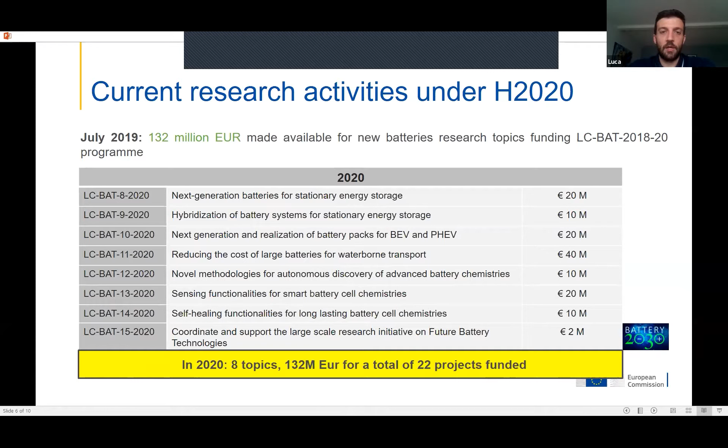The key takeaway of the last three slides is that since this started in 2018, there has been an increased number of topics available throughout the years, an increased number of projects funded, and an increased available budget. This represents the fact that these research activities have become more important. Specific topics have been allocated, new activities to research and agree on these topics, such as the battery partnership, have been set up. I think these activities are here to stay, and we will see more in the future after 2022.

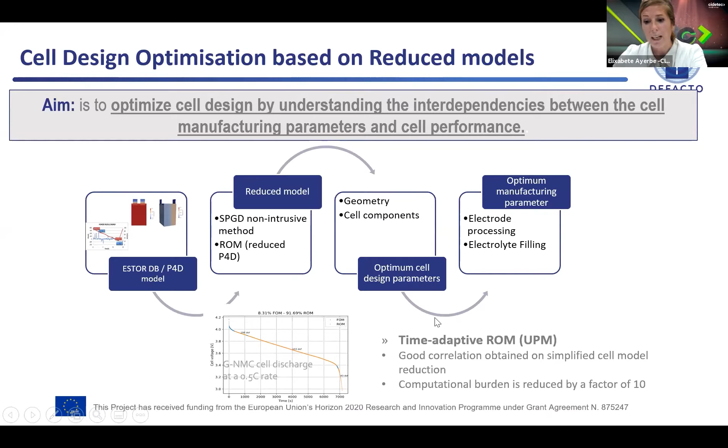So when we do these optimizations, we need to rely on experimental data, and this data will be obtained within the whole domain, starting from materials, coming to the electrodes, and then going to the cells. Basically, the aim is also to track the uncharacterized intermediate products along the manufacturing process.

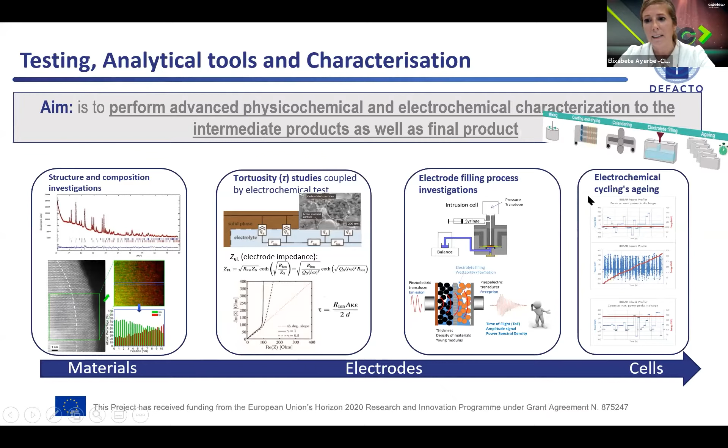So electrochemical and aging tests will be done on pouch cells, and there will be two kinds of pouch cells. One is coming from the prototype pilot lines, what we call prototype scale cells, and the other will be manufactured by an industrial partner, a commercial cell, graphite NMC 622.

So we will be having a comparison between the two scales, and we are also currently inserting and implementing sensors throughout the production line in order to get data monitoring of the manufacturing process.

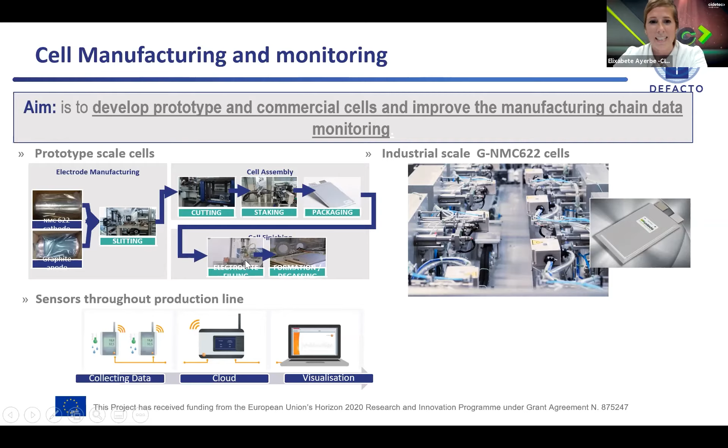So with this, I would like to thank the whole consortium. We are 13 partners around different EU countries, and I'm at your disposal if you want to ask any question. Otherwise, you can reach me at this email account.

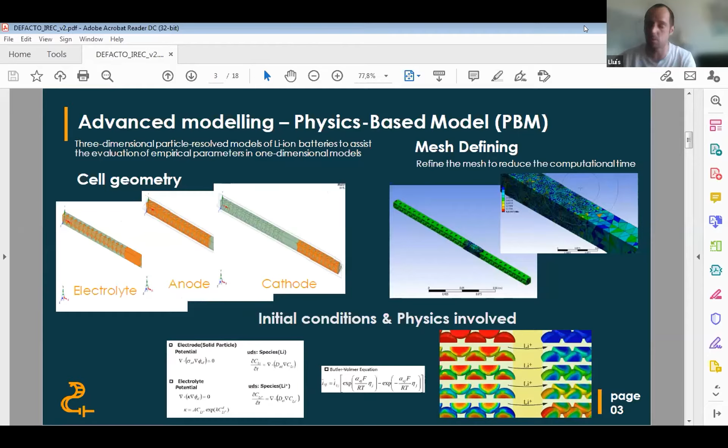In the physics-based model, the full order model, what we do is define the geometry for the components - the cathode, anode, electrolyte, and so on - then define a meshing, and then we have to put in all the conditions and physics involved for this exchange of ions. There are applications like analyzing the aging process, or even reducing the effort in aging tests, optimizing cooling systems, or analyzing these complex phenomena that happen inside the cell.

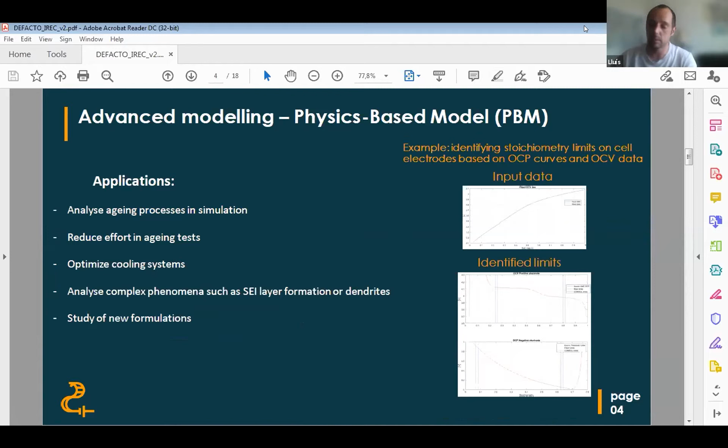But since what we want is to run this kind of model in some embedded system, what we have to do is aim for this reduced order model, where we have to reduce the complexity of the model but still capture some of these key phenomena.

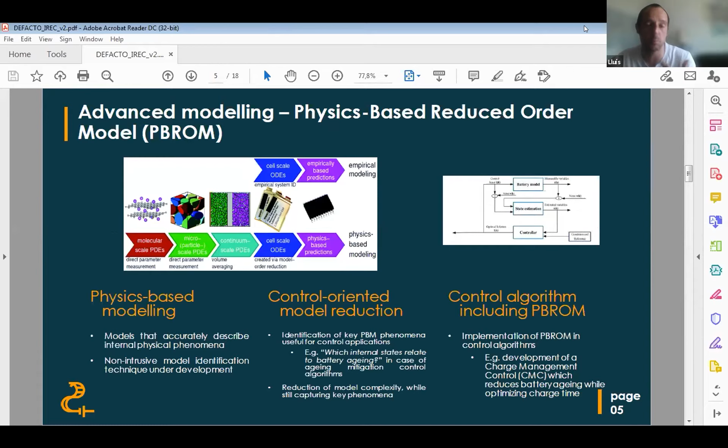And then we can use it online, this kind of algorithm, for instance, for charge management control. During the charging of the battery, what we can do is optimize it by reducing the impact of the degradation of the battery. Then on the other side, we have a novel amount of sensors proposed for batteries.

Of course, we have the standards - voltage, temperature, and current - but there are many others, like the strain gauge or the EIS, the electrochemical impedance spectroscopy, pressure, gas detection, humidity, and others. There are many. They can also be placed on the cell or sometimes inside the cell. There are these two options.

Here in the COBRA project, what we are trying to do is improve what we call the smart cell functionalities, like providing some sort of small brain to the cell just to let it handle itself and provide useful information for the BMS. So just some examples, for instance, the EIS sensor.

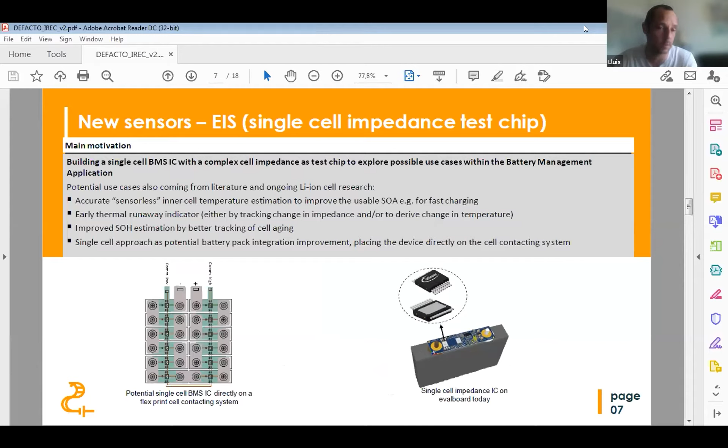It can be used to gather information and estimate the core temperature of the cell. This is very important, for instance, for fast charging strategies. Also, it can detect thermal runaway, so early detection of failures, very important from the safety point of view, but it can also provide information about the state of health.

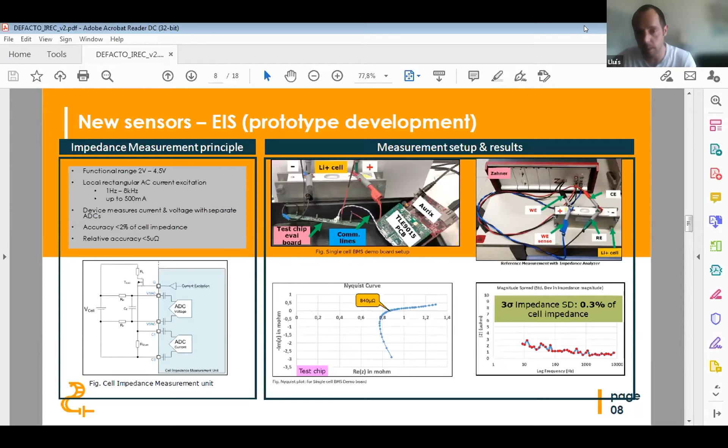Here you can see some of the main features of the prototype that's under development, some pictures here and some preliminary results. And we also have the strain gauge.

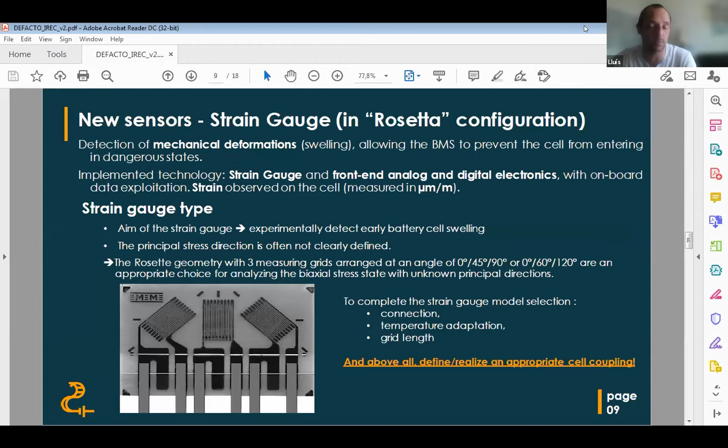Here, what we are measuring is the mechanical deformation, because the cells have this swelling, changing of volume, when they are at different states of charge, for instance. So we can provide some inputs to the model just to identify correctly what the state of charge is, but it can also prevent excessive swelling, for instance, if it can indicate that there's a danger behind it.

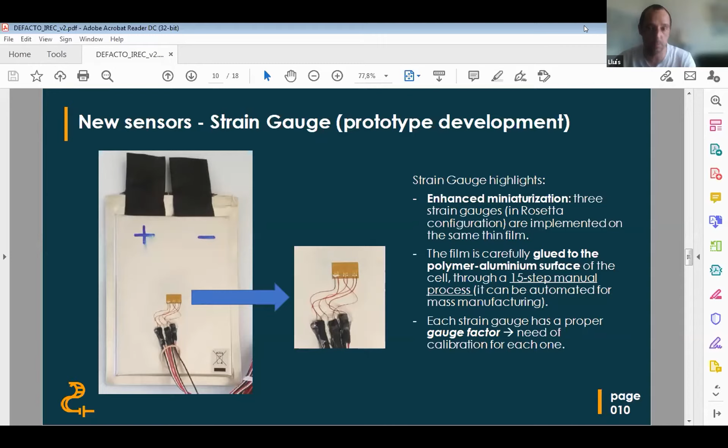Here you can see some images of the prototypes and the development. And here, for instance, one of the challenges is attaching the sensor to the cell, which currently is a 15-step process, but it can be automated, and we are working towards that.

We also have a multi-gas sensor based on laser technology. Depending on the wavelength, it can detect different types of gases. This is important from a safety point of view, because there can be problems inside the battery if some type of gas is detected.

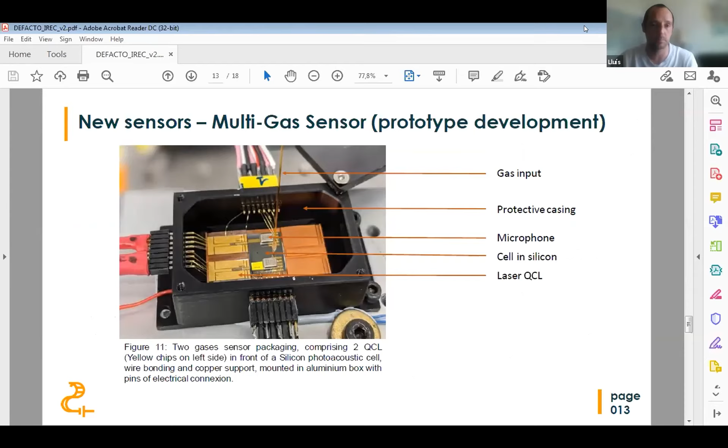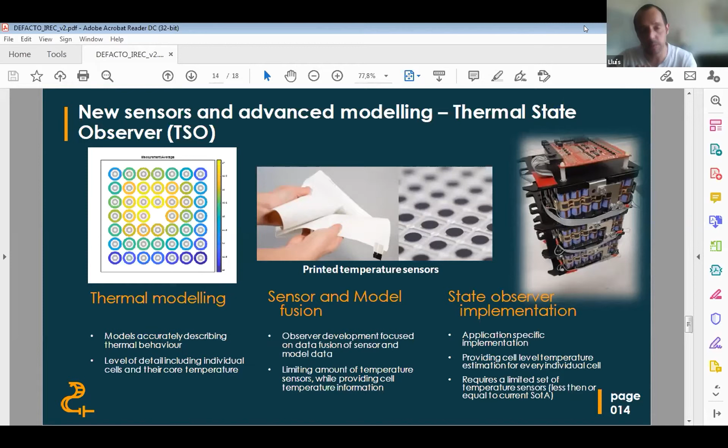Here's also a picture of the prototype and its development, with the main components depicted. And we have here an example of this twofold approach, because we are developing a thermal model of the battery, but also placing temperature sensors at the cell level, and then we can mix this information. In this way, we can have something very accurate, providing information about the temperatures inside the cell and throughout the battery pack.

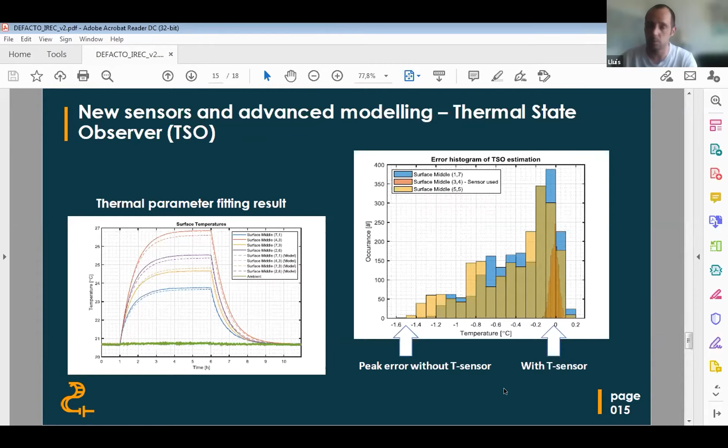Here are some examples of the application. You can see how the error, when you are only using your algorithm and model, is approximately 1.5 degrees peak error. But when we mix the information from the model and the sensor, the error is 10 times less, nearly zero. So that's the kind of application, and just a summary of this twofold approach.

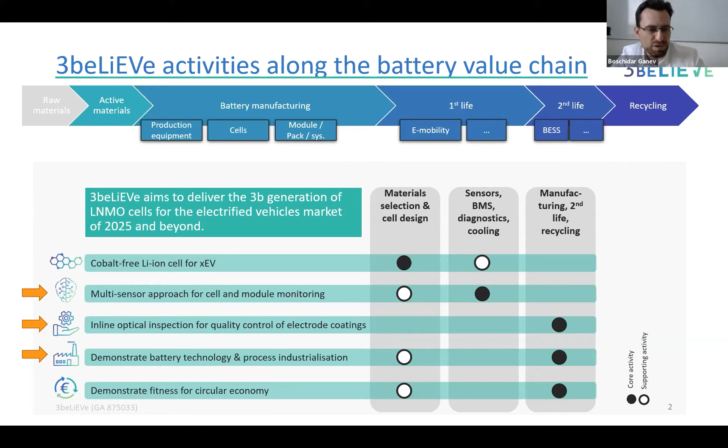While digitalization is not the core topic of the project, it is actually a cross-cutting aspect across almost all of these topics, and I just want to touch briefly on three of them. So the first is on the battery manufacturing level.

As we know, in the electrode coating process, when it comes to deposition of the slurry, sometimes there can be an inhomogeneous deposition, which can lead to coating defects. That means there can be too little coating in some parts of the electrode or too much material in other parts, and this can manifest as scratches, pinholes, cracks, or agglomerations.

The challenge is that both electrodes, the cathode and the anode, are quite dark materials, so visual inspection is quite difficult and would be very time consuming by eye.

So we can employ an optical image acquisition process, and the data acquired from this can then be used with machine learning to detect the defects and classify them by defect type. So what can a system for this look like?

In terms of the system, it's a camera with a set of 4 lights that sits as part of the electrode coating steps.

After the slurry deposition and the drying process, a camera inspects the coated foil using 4 lights and acquires images, computing surface normals and the depth map of the surface, and then, as shown in the previous slide, detects the various defects.

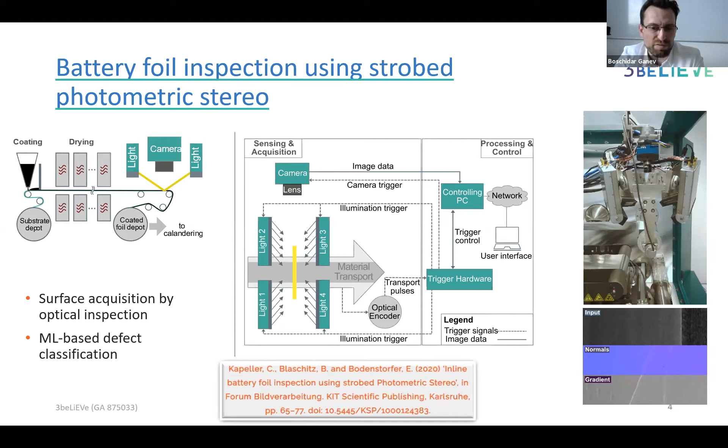Coming to the multi-sensor approach: like in Cobra, we also employ multiple sensors that, beyond voltage, current, and temperature, also do EIS measurements, strain or deformation measurements, and can do gas detection.

The first order of business here was to establish a common communication architecture so that signals acquired from these sensors can all be relayed via a common data bus to the battery management system. The other aspect is that the open source based foxBMS system had to be updated in order to recognize and process these signals.

The second aspect of digitalization is that if we think about the measurements coming from all these sensors, tracking all the different data points over weeks, months, or even years of battery lifetime, a lot of data would accumulate. At the same time, usually on BMS there's only very limited data storage capacity, typically reserved for safety and performance metrics, so there's very little space for large volumes of cell cycling operational data.

But this cell cycling history can be very valuable. Two examples of what can be useful: on one hand, after the end of first life, a potential second life operator would be quite interested to know how the cell aged. Apart from its state of health, which might be relatively easy to determine, it makes a difference under what conditions it reached this state of health. Having access to such data could help better estimate what second life uses such a battery could be put to.

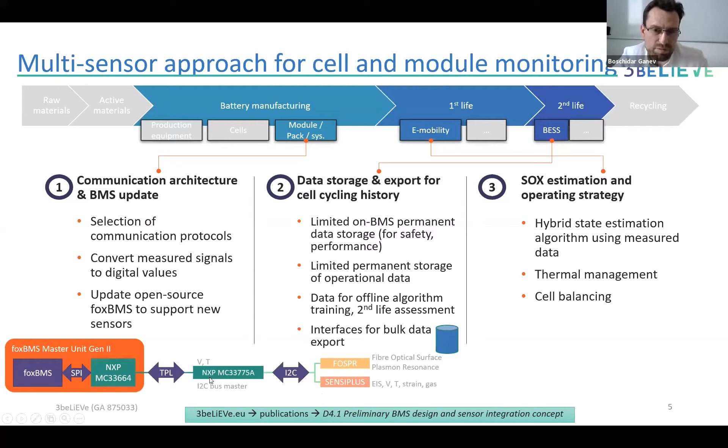Finally, when we've finished designs on cell, module, and pack level, we like to think about what production of this technology looks like on a gigawatt-hour scale. So we start to model the processes: what does the real-life process look like, what are the necessary parameters, and how can we model this. For this, it's necessary to model the attributes of machines and input parameters in appropriate simulation modeling software.

Here on the right you see just one example, a small subset of the processes: a 2D simulation of notching, lamination, and stacking—but there are many more processes that can be modeled.

The interesting takeaway is what questions can be answered with this model. I've put just a small subset here: what does the factory layout need to look like to produce a certain volume of cells, modules, or packs? What are the interactions between different process steps in the production line? How can material flow be improved? What is the energy use and corresponding greenhouse gas emissions resulting from production processes?

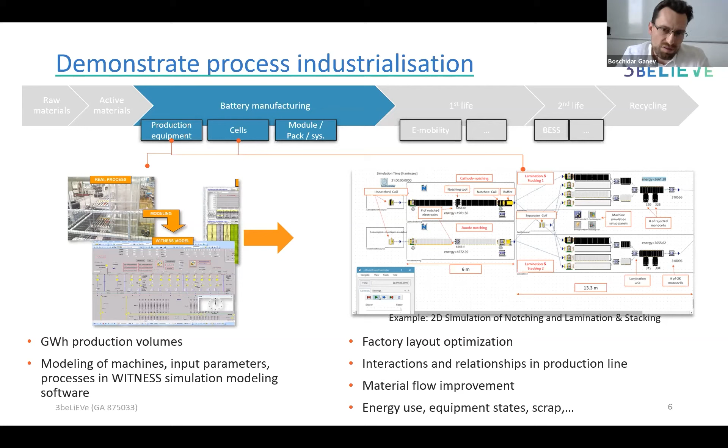As you can see, we have a large number of partners—21 partners from 10 different European countries. I'd like to extend my thanks for the very good collaboration so far. We are in month 18 of our project, with 42 months in total to go.

Many aspects I showed in the previous slides are still under development, but when the time comes, we will publish results. I should also mention that 3beLiEVe has opted into the open research data pilots, so we absolutely intend to make some testing data sets available to fellow researchers.

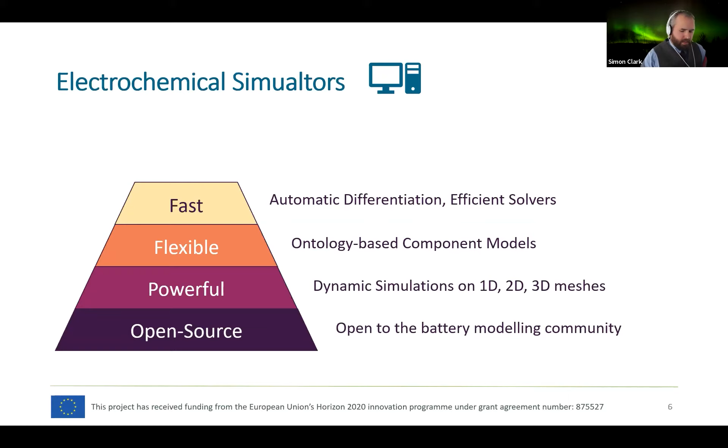In Hydra, we're bringing all of this together in an open source battery modeling platform that we call BattMo. So what is BATMO? BATMO is a finite volume continuum modeling framework for electrochemical devices. So for those of you with a background in the field, it's capable of solving P2D, P3D, P4D models.

It's electrochemistry neutral. So of course in Hydra, we're focused on the development of lithium-ion battery models for generation 3B materials and components, but we're not limited to just that. BATMO is flexible and can model post-lithium-ion systems as well as even hydrogen and electrolyzer systems.

BATMO is currently implemented with custom solvers in MATLAB to enable it to be very fast and efficient. And we plan to make it even faster by creating an implementation in the open source language Julia. So this is planned for release in summer 2021. When it's available, you can find out more about it at batterymodel.com.

So moving forward, I'd like to highlight the experimental database section, starting with a quote. "Data, data, data," he cried impatiently. "I can't make bricks without clay."

And who said this? It could be a frustrated PhD student. It could be the PI bursting into your lab. But this was Sherlock Holmes 130 years ago. How little the world has changed. And in Hydra, of course, and in battery digitalization generally, this is true.

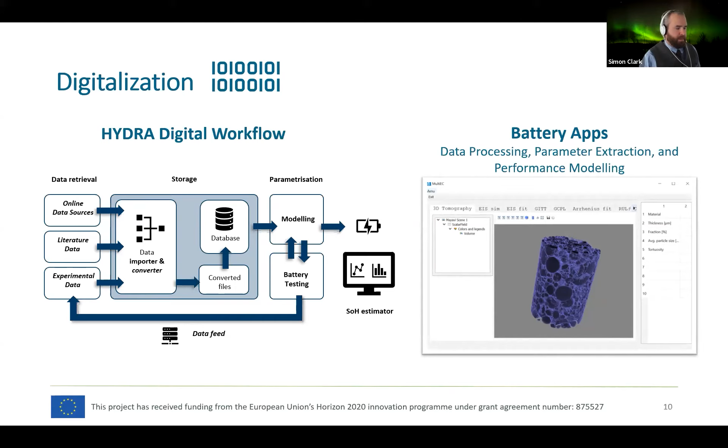So just to summarize, battery design requires knowledge, models, and experiments, and digitalization enables the efficient exchange of information in the design process. In our project, knowledge is formalized in an ontology. The modeling ontology is used as a foundation for a flexible, powerful modeling framework. And the characterization ontology is used to ensure the interoperability of experimental data.

Data exchange and operations are described in experimental workflows, and within Hydra, we're developing user-friendly battery apps to help make this as accessible and useful to the battery community as possible. If you're interested in learning more, you can visit these websites: bigmap.eu, h2020-hydra.eu, and batterymodel.com. So thank you for your time and attention.

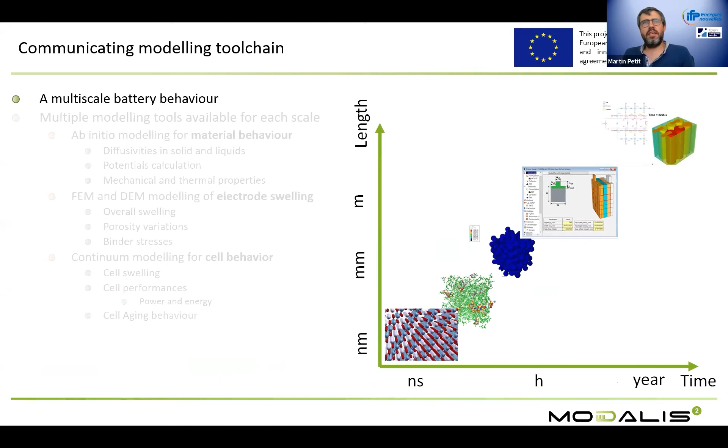One of the main issues that we have regarding modeling in batteries is that we are facing a multi-scale behavior, as you know, from the material scale to the global system scale, and multiple modeling tools are available for each scale. Ab initio modeling is used in order to get the behavior of the material, especially diffusivities, potentials, mechanical properties.

Specific mechanical modeling is also of use at the mesoscale or microstructure scale for the overall swelling of the electrodes, the porosity variations, some stresses on the binder. And one of the main...

...objectives is to get the complete cell behavior that we get at the continuum modeling scale. And we are aiming in MODALIS2 to get from this modeling scale the cell swelling, the cell performances in terms of power and energy, and cell aging behavior.

So the aim of MODALIS2 is to create ways of passing parameters between these scales and tools in order to be able, from a modification at the material level, to understand the global behavior of the cell at the system level, thanks to correlations, Arrhenius laws, and so on, but from the lower scale calculations.

In parallel, for all these dedicated modeling approaches, a dedicated experimental campaign is made thanks to devices and facilities that we have in the consortium, as we need dedicated experiments for model calibration and also model validation.

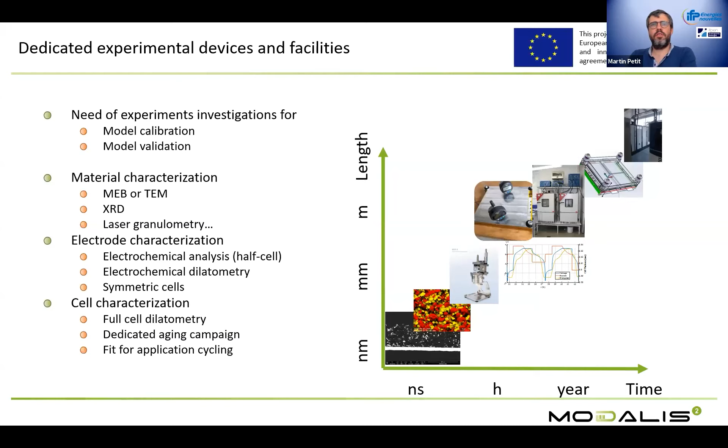With the full cell dilatometer, a dedicated aging campaign is used in order to analyze the aging of the cell. And in this aging campaign, we will have some dedicated tests fit for the final application, that is the automotive application.

So as I said earlier, this modeling toolchain is to be developed especially for new battery technologies. There are already a lot of modeling developments that have been done for classical Gen 3 batteries. But in this project, we want to focus on next generation batteries, especially high content of silicon for the anode in the Gen 3B cells. So as we know, in this case, we will have a higher specific energy, but also a higher mechanical degradation of this electrode due to the behavior of the silicon.

So in order to characterize and analyze this behavior, we will have some ab initio modeling of the material properties in order to get the thermodynamic properties of the silicon oxide of our material for the negative electrode, the thermal and mechanical properties of the silicon oxide, and the transfer properties in the liquid electrolyte, as well as the active material.

Then, thanks to this data, we'll be able to perform a mechanical modeling of the negative electrode, giving the swelling of the electrode as a function of state of charge, of C rate, and of the constraint on the electrode. And finally, apply these two lower level modelings to the continuum modeling in order to assess the performance of the cell. And then once this first development on the Gen 3B is in motion...

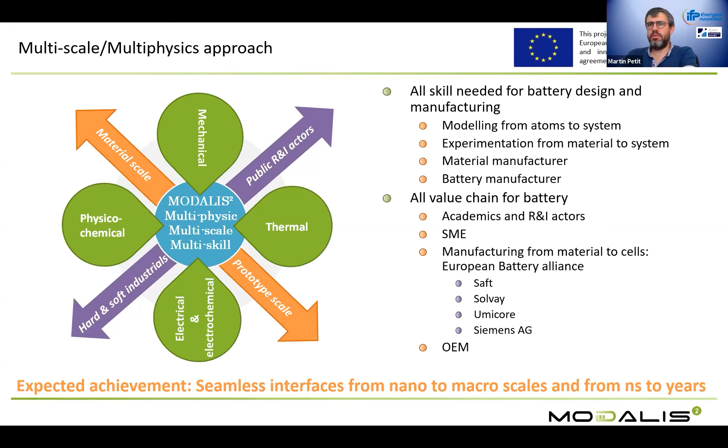So I will describe now the main use cases that we want to create during this project in order to demonstrate the possibility of the modeling toolchain. And the first end users are the material manufacturers.

Sorry to interrupt you, you have 2 minutes left. Okay, I'll be quick, thank you.

So the first one is the Solvay use case, and in this case, they will want to investigate the effect of the electrolytes on the full cell performances. So using ab initio modeling, like GROMACS, they will do some molecular modeling of the electrolytes and apply these results into the full-scale models in order to evaluate the effect of defects on the cell behavior.

And at the same time, Umicore will do the same thing with the positive electrodes in order to investigate the effect of using specific coating on the positive material, in order to investigate the behavior of the material at the full cell.

Then we have the cell manufacturers, so Saft. They are using the toolchain in order to get better design for their cells. So based on this modeling toolchain, they will want to adapt their process, cell design, and assess the cell behavior, especially looking at the formation steps.

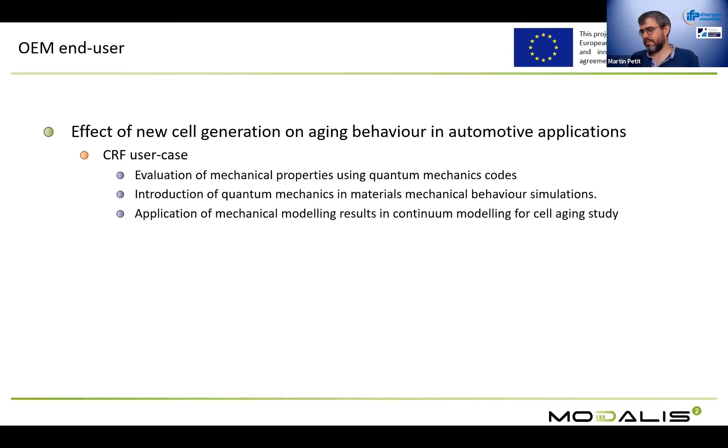So at the moment, we have initiated the development of the toolchain, especially for Gen3B. Ab initio modeling is being performed to assess the behavior of positive and negative materials. We are also performing mechanical modeling with FEM and DEM codes to simulate the microstructure during charges with high content silicon. And we have developed a framework for the Gen3B battery modeling, taking into account aging, diffusion-induced stresses, and cell swelling.

So at the moment, we are just beginning the work on Gen4, but we will prepare a first set of parameters in order to model the electrolytes that are foreseen in the project. And the next step is to perform these experiments on Gen3B cells in order to feed our models.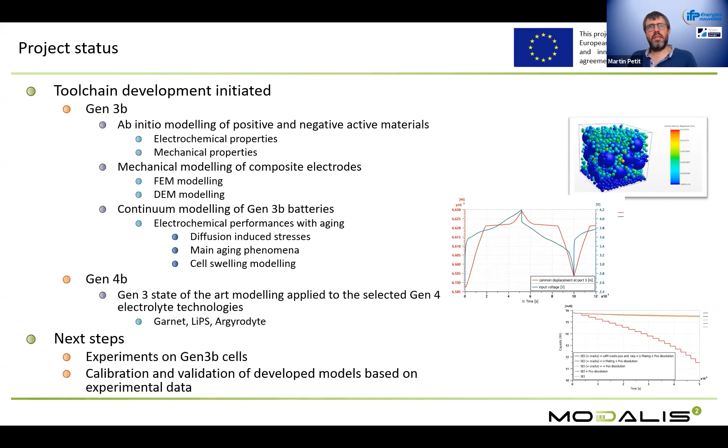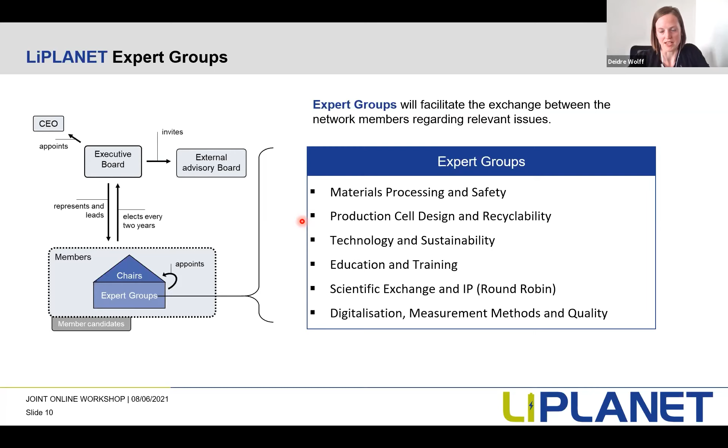We have already had our first initial expert group meetings where the expert group members elected an expert group chair for each of the 6 different groups, which can be seen here.

Focusing in on digitalization, within these expert groups there will be crossover between some of the topics worked on. However, we also have an expert group that works specifically on digitalization, measurement methods, and quality. Within this expert group, some of the subtopics that will be worked on are, for example, modeling—physics-based, multi-scale, multi-physics, and cyber-physical—machine learning tools, standardization of APIs or data standardization, quality control, and inline measurements.

Another aspect currently being worked on within the LiPLANET project in regards to digitalization is training being developed on the benefits and challenges of digitalization in battery production. This will be organized as a workshop covering cyber physical production systems, data acquisition and management, data analytics and data mining, decision support, and some use cases as topics to be discussed. This is currently in a very early development stage, and more information will be available within the upcoming month.

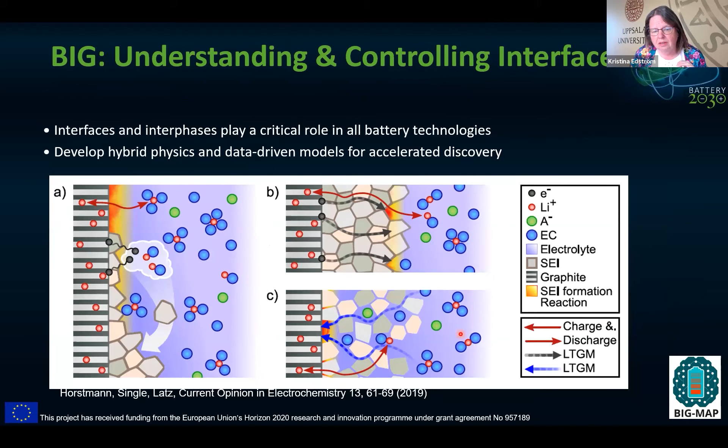And we want to develop hybrid physics and data-driven models for accelerated discovery also here, so that is important for us. And so the mission is enabling autonomous data acquisition, analysis, prediction, and utilization, so you have this closed loop between these different parameters, marrying the modeling and the experimental parts better together. Because if it's something we all do, is that we generate a lot of data all the time when you do some battery research. And I think I've thrown away about 95% of my own data that I have collected since mid-1990s in this field.

And so we have put in our roadmap some kind of goals: where are we supposed to be 2023, and where do we want to be 2026? So we are now working very much on a shared FAIR data infrastructure. And this FAIR data, our first big data handling plan was actually published. I think it's one of the most complex ones you can find, and you can actually find it in the databases of literature, so you can see how that looks. And that is to have this whole collection together. It's a very ambitious project.

Just to say something about the smart functionalities and the three projects we have there, they have complementary sensing technologies. So if you look at Instabat, they're working on optical fibers, and they try to go into the cell and really pinpoint the details by making a lab-on-a-cell sensor inside the battery cell, and really try to look at thermal vibration, electrochemical reactions, having reference electrodes, etc.

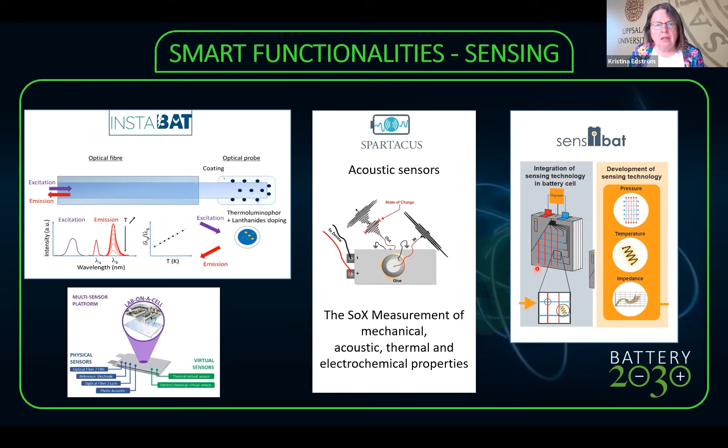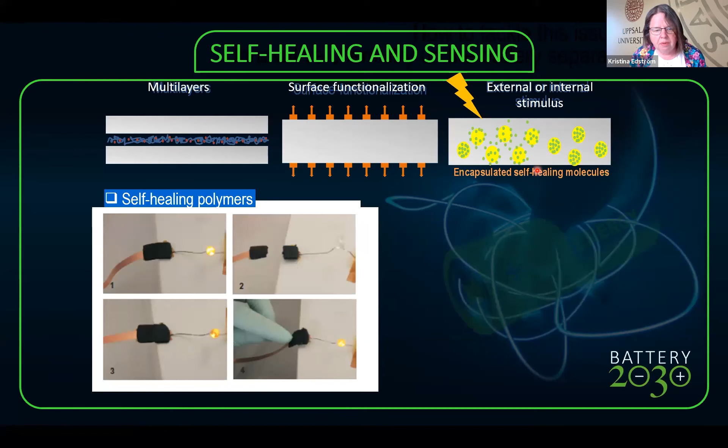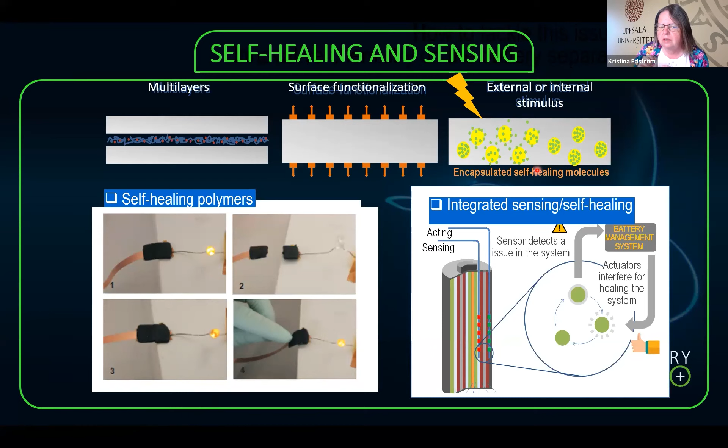And of course, many of you, I think almost all projects I saw working on silicon electrodes. This is just one sort of visualization of how you could have a self-healing polymer accommodating the breakage because of the volume changes occurring when you have the silicon electrode. And here's another way of looking at something that breaks and can heal itself. Our goal is that we could have a sensor sort of given an external or internal stimulus to have these self-healing components kick in.

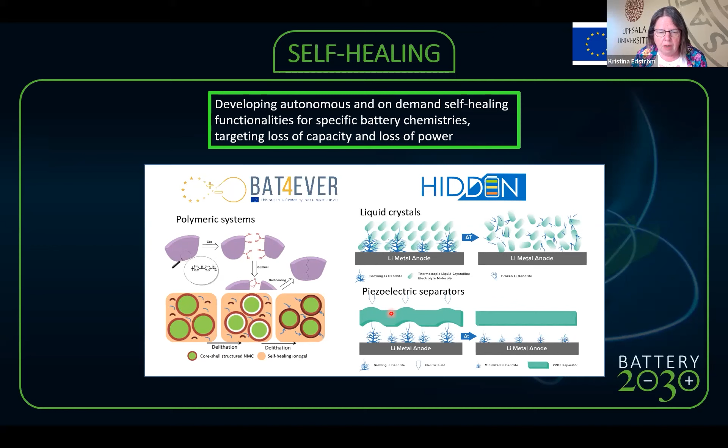So this kind of support system, like Battery 2030 Plus with the big pilot lines, is a dream to have for this kind of research when it moves from a really early research state into more of an upscaling phase, which we hope will happen. So next for us in the pipeline is to really stress the manufacturability, what we call cycling.

So we are now proposing new R&I actions for the 2023-2024 work program. We have a long-term vision for manufacturing, where we see the digital twin for the cell manufacturing process as very important.

The work is de facto starting, and we have the excellent work of Alejandro Franco in Amiens, who is working on this kind of concept of modeling the different parts in the whole process of making electrodes and batteries. Digitalization is, of course, the core in this.

We also have a vision that we can include in parallel with Big Map, working together with Big Map on manufacturing and recycling, like the sensoring projects are working together with Big Map now for building up the databases.

We are open to have even more ideas on new R&I actions. We submit them to the European Commission and to the Battery Partnership, BEPA. We also channel it through Batteries Europe to have consensus and support for our ideas, and it all fits to our roadmap.

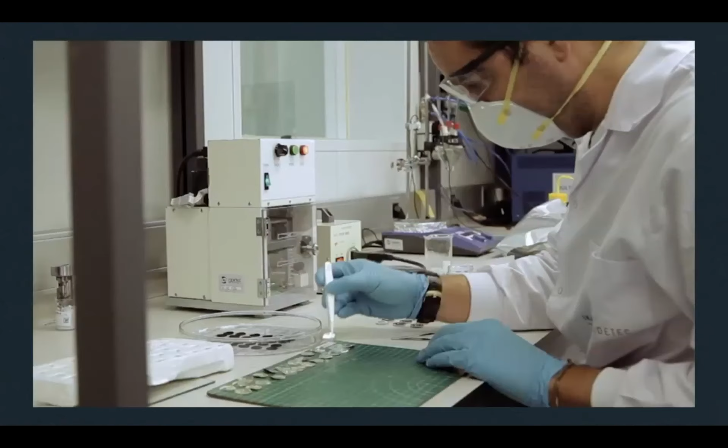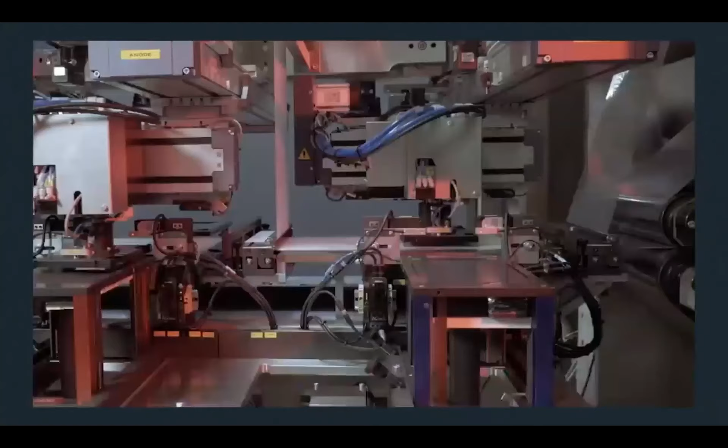In an ever-changing context, where immediacy and swiftness are essential to make progress, we want to introduce the ultimate tool that will help you reduce time to market of new batteries. We present CideMOD, a battery simulation software promoted by CIDETEC, a digital solution that responds to the most demanding needs of the energy storage industry. CideMOD helps material manufacturers, battery manufacturers, and OEMs alike, speeding up battery development safely and accurately. CIDETEC Energy Storage involves 75 multidisciplinary researchers. We develop cells and components in our own battery manufacturing pilot plant, from the earliest research phases to battery pack engineering, through modeling and characterization.

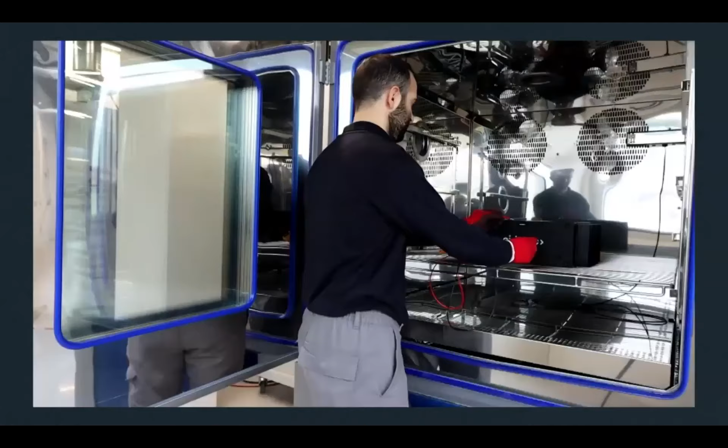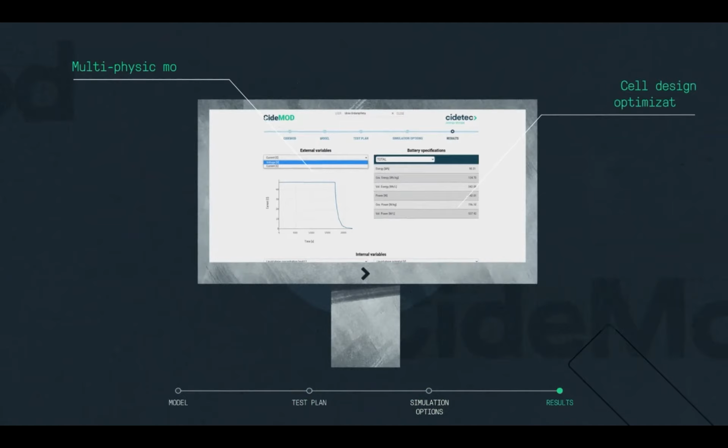Thanks to the knowledge and understanding we have acquired in 25 years of research, we are now able to offer a precise simulation tool based on our own experimental results. CideMOD is the perfect digital solution for battery manufacturers, a user-friendly and intuitive software with low computational cost that allows modeling battery behavior. CideMOD is based on multi-physics models and permits the optimization of cell design, considering components and geometry, predicting battery lifetime, and optimizing operating conditions. In addition, your time to market will be reduced by 40%, testing costs will be reduced by 30%, and design time will be reduced by 30%. Our aim is to help you mitigate risks in the search for new battery materials and accelerate the development of new batteries. Together we can grow and keep moving forward, bringing the future closer, faster. CIDETEC Energy Storage.